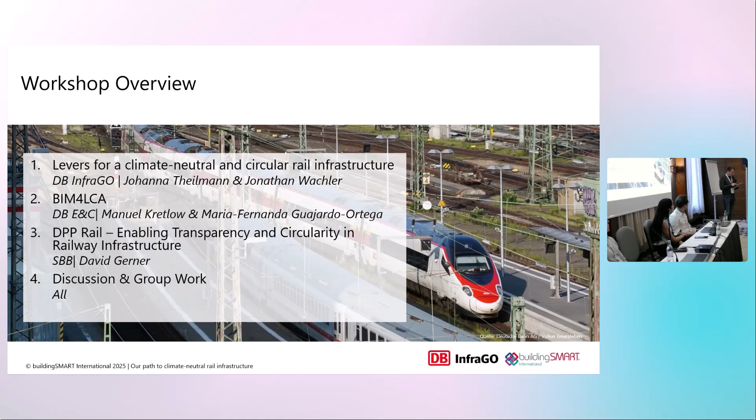It's not only a problem of our advertising that we are currently running. It's also the second problem. What we have to talk about is the mode of transportation. When we compare ourselves to different types of transportation, like airplanes or car transportation, we are the most sustainable one. But it's mostly the case because of the rate of electrification of our transport.

But in the next years, you all can read the news, especially when we talk about car transportation - they will also electrify their mode of transportation. And when we assume that the electrification on the streets is probably around 2030, when we're looking on 2030 or 2035, the rail infrastructure is more coming into the whole picture.

Railway infrastructure is mostly based on concrete and steel, and it's more intense than for the roads, because we have higher loads that we have to transport, lower gradients, and we are faster. So it's a lot about concrete and steel.

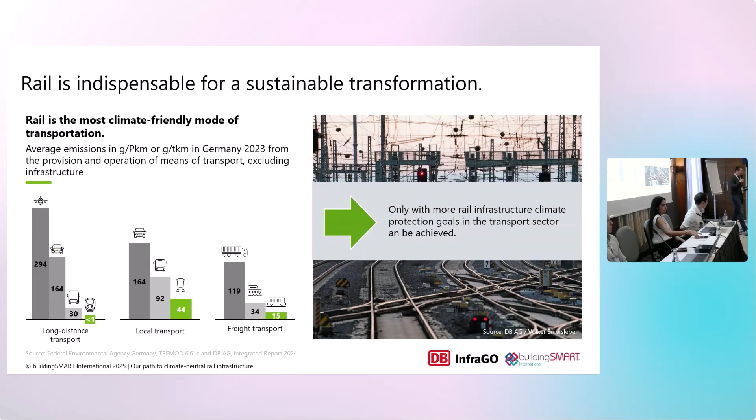It's always good when you make an analysis to know the status quo, and to look a bit into the past to know what the problem is and how big it is. But the more important point is always to look into the future.

We see, especially in Germany, that in the next years a lot of money is going into the railroad infrastructure. You can make a small correlation and also a causal claim: money into railroad infrastructure is money into steel and concrete, and that's always getting higher emissions in the long run. So that's pretty negative for our advertising claim that we are the solution in the future.

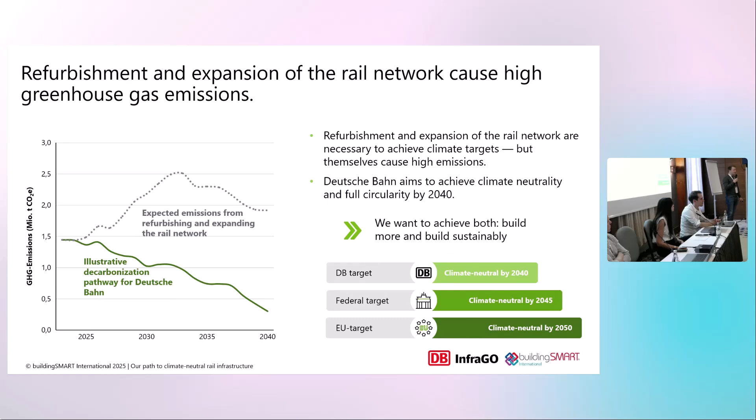What we see is that it's not only important to look into the future and say how big the problem is. The next step is always to look at what you can do in the future to tackle this challenge.

So now it's time for the funny picture.

We spoke a lot with our main suppliers, with our building companies, to ask them what they can do to work on the problem of emissions in the railroad sector. And we came up with 6 levers to tackle this challenge.

The first is always the planning. It's about the materials - we have to focus on the reuse of materials. The logistics is always very important for building infrastructure, and we have to talk about the stations and the maintenance.

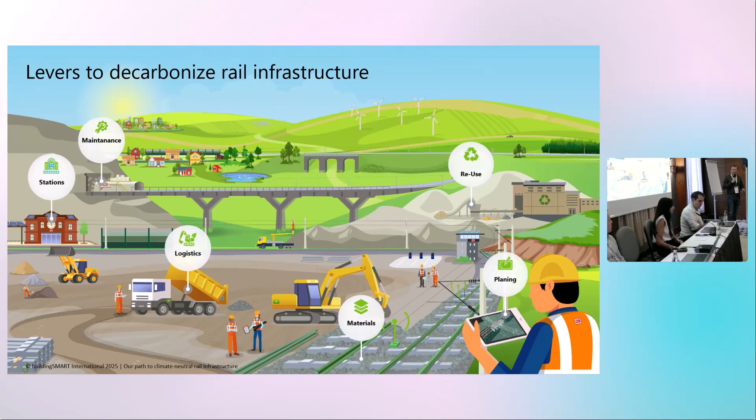These are the 6 main levers to decarbonize the railroad infrastructure and to still focus our green claim. What is behind these levers?

When we start, it's always about the planning. I think you all know that the greatest ability to change a plan is always highest in the first sections of the planning phase - it's always in planning phase 1 and 2. That's where you have the most impact on the infrastructure. So it's about optimizing the construction method, the structure, or the geometry of a building or a bridge.

When we talk about materials, I already said the railroad infrastructure is mainly about concrete and steel. It's also about ballast - ballast is not a very carbon intense material, but it's a lot of load or mass, so we also have to talk about these materials.

We also have to talk about the reuse of these materials. At Deutsche Bahn, we are already pretty okayish when we talk about the reuse of sleepers, rail steel, and ballast. We have different targets for these materials, but we need to get more into these topics, especially in the next years when we start our huge refurbishment program for our railroad infrastructure.

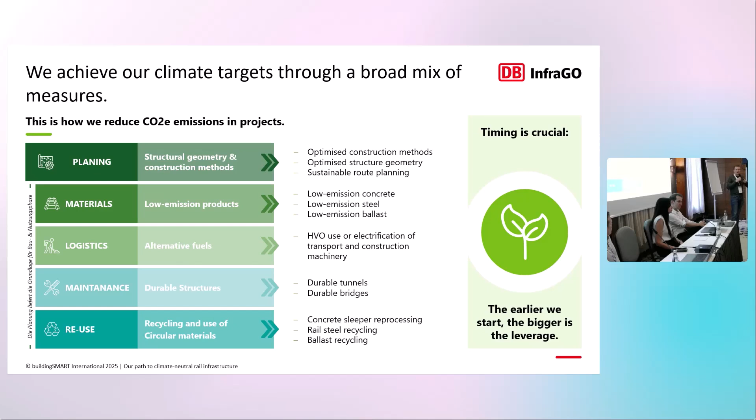Just a short hint to the next two presentations. For us at Deutsche Bahn, we speak a lot about green BIM as our process to assess energy efficiency of our buildings and the sustainability of our infrastructure projects throughout their entire life cycle.

And that's the part where my colleagues come into place. We need more data-driven or evidence-based insights into our buildings, bridges, and tunnels to make good decisions. And that's what Fernanda and Manuel will talk about.

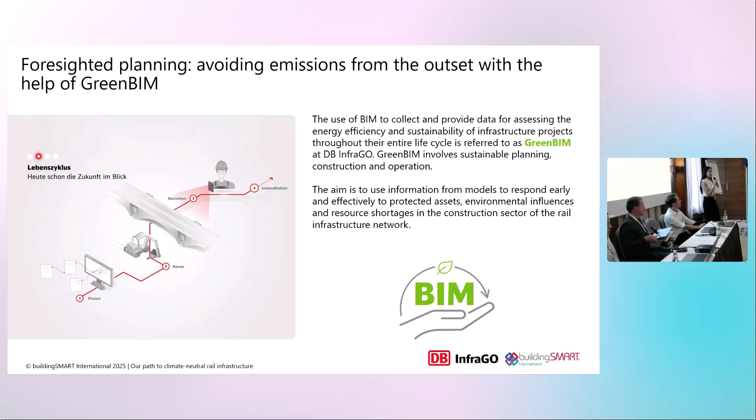Now we understand our goals as a company and where we want to head into sustainability matters. I would like to present a BIM based life cycle assessment, BIM for LCA, which is a tool that we have developed in the DB Engineering and Consulting Group.

So I guess the first question you are having right now is, what's actually a life cycle assessment, LCA? Well, basically, it's the evaluation of the environmental impact of infrastructure in its whole life cycle.

So we take into account the materiality and also the energy flow of an infrastructure project, of course following the corresponding standards and norms, which gives us a framework to work with.

I guess you're more familiarized with this type of analysis, but from the perspective of costs. So we evaluate, okay, how much is my project going to cost in the construction phase, how much I will need to pay for operation and maintenance.

We analyze this throughout the costs in euros, in dollars, in the currency you're working on. We do something similar, but with carbon CO2 equivalent emissions. And therefore, we can evaluate different designs and take good decisions based on the information.

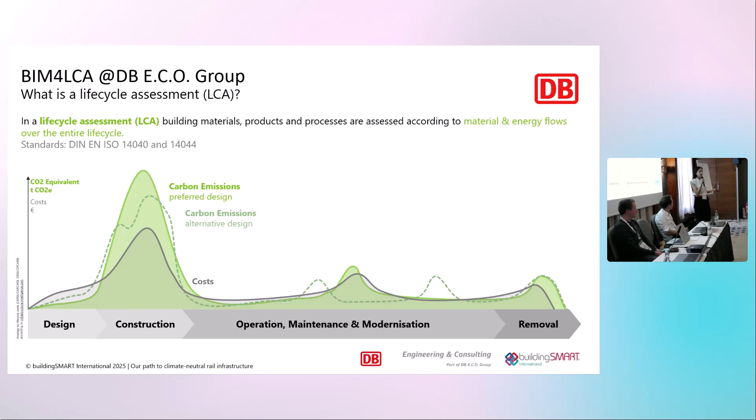Okay, really nice, this idea, but where can I get this information? How can I calculate the CO2 equivalent? Well, here we have a very important part, which is the EPD, the Environmental Product Declaration.

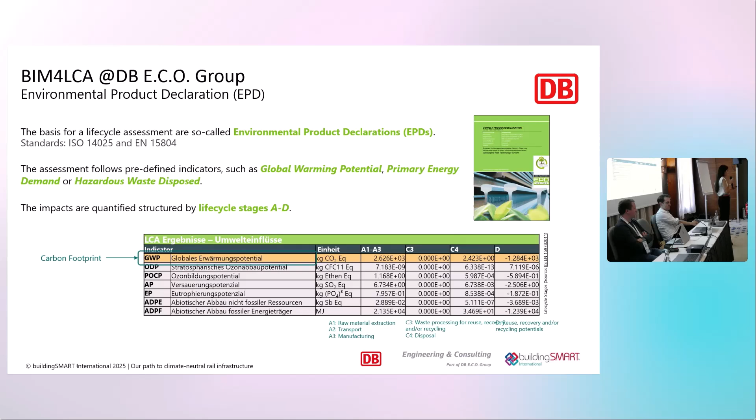Really nice. Now, you haven't spoken about anything related to what we are here for at this conference, Building Smart. Well, we already spoke a little bit about the environmental information, but there is a very important part, which is the information of our design. And here is where BIM comes in. I have pointed out three main topics that allow us to do a life cycle assessment.

The first one I have pointed out is open BIM formats. Of course, we need the information of our infrastructure project. How can we access this information? We can access it through model integration via IFC.

Of course, we also need standardized environmental data formats so we can create processes. This can be, for example, stored in XML, but with standardization, so we can have consistent life cycle information.

Also very important, we need access to EPD databases, which should also be reliable. In Germany, we have the Ökobaudat, which has a considerable number of EPDs, which we also use in the evaluation of our projects.

So to create an LCA, a life cycle assessment, and to reach its full potential, we need to integrate the data and make it interoperable. If we have centralized data management, we can connect the BIM information model with the environmental data.

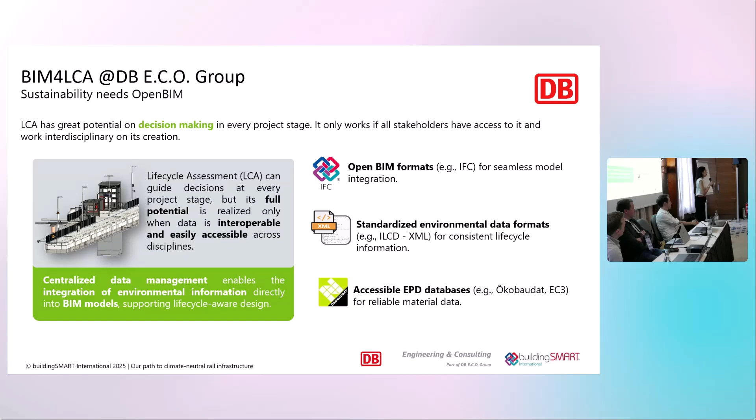In IFC 4.3, there is actually also the possibility — there's the Pset_EnvironmentalImpactValues, where you can see the climate change value. I don't think you can read it because it's quite small, but believe me, the information is there.

But we think that the workflow this offers is not so efficient. That's why we suggest a different approach: BIM for LCA, which allows us, with a very small number of LCA attributes, to connect the object information to an external EPD database. So we are not storing the whole EPD information in the model or in the objects.

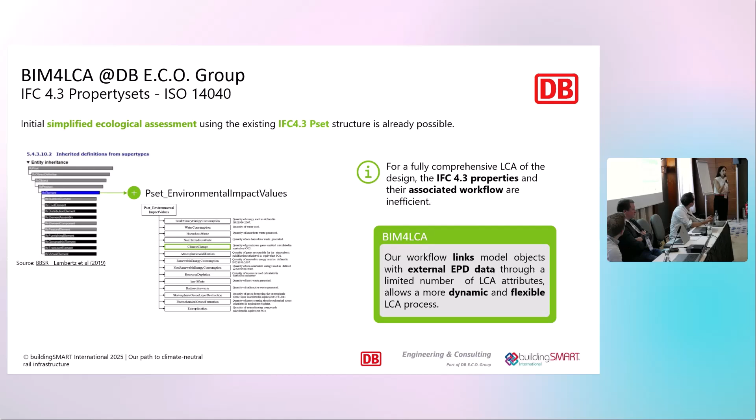Here I have an example to make it a little bit more clear. So if we have a BIM model, the first thing will be, okay, we have the object wall. Then throughout the BIM model, we can get the quantities. In this case, we have 129 cubic meters as volume. Then we go to our EPD source and we search for the material information. In this case, this is concrete.

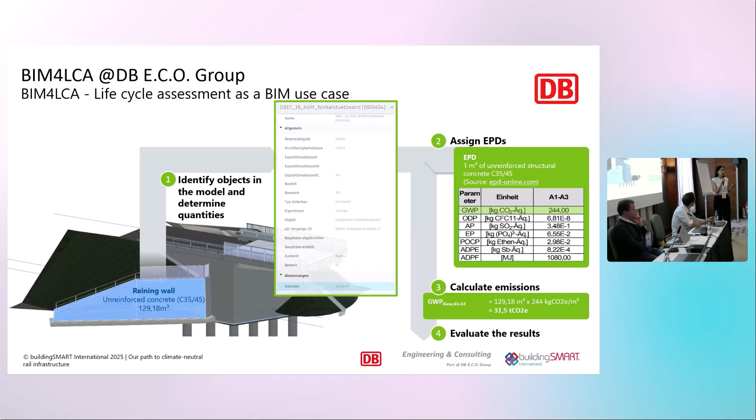C35/45, and we can see that the cube, which is 1 cubic meter, has a global warming potential of 244 kilograms of CO2. So as we are working also with the same units in this example, it's quite easy. We do the corresponding multiplication, and then we get for that object the amount of CO2 equivalent emissions. This is a very general example, so we can understand a little bit how this works.

But this is the workflow that we are using at the moment, which is a full model-based approach. We start up with the discipline models, the different discipline models. Then we create the coordination model, the federated coordination model. And from this model, we only use some few LCA attributes. And then we get the quantities based on the BIM model.

And we transpose these quantities to our own LCA engine that we have created. And this connects this information with external information through APIs, so application programming interfaces, to external EPD data. This can be the Ökobaudat here in Germany, but we can also use different sources of information. And then we do the right calculations in this engine, and then we return the results, which can be also exported and further analyzed.

But also, we don't want to stay there. We are also working on BIM model, so we must use the chance also to visualize the results in the coordination model, which we also do. This is quite dynamic and flexible, so we can change, and if there's a small change in the EPD database, we don't need to change the whole information in the objects. We just update these connections. And this allowed us to make a faster iteration process with the design.

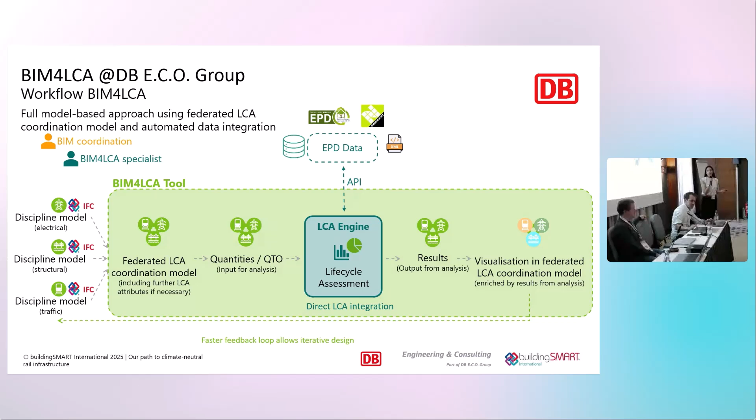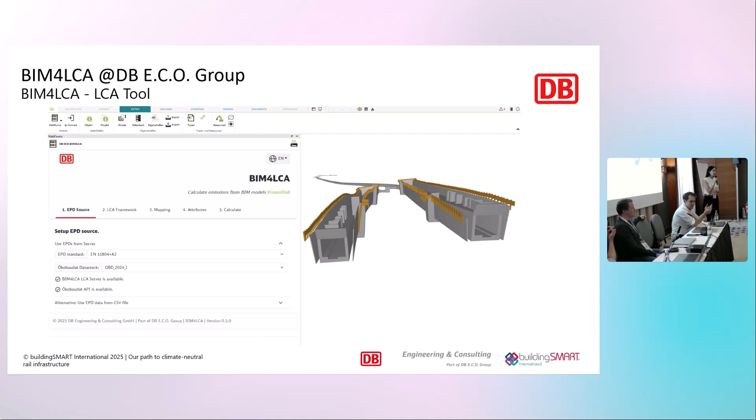But afterwards, we are going to have a live demonstration. So if you're interested, my colleague is going to explain that, and you can approach us and we can show you different models that we have done the analysis, the LCA analysis. And we can see the different settings that we have used and the LCA attributes that I have mentioned here.

So here also we have a project which was the administrative building of an ICE trains depot for Deutsche Bahn Fernverkehr. And we had two designs, and with the tool we could also visualize how were the emissions of the two designs. Also, we have here a better understanding of the emissions in the different life cycle phases. And therefore, we can take more informed decisions based on data from the BIM model and also from the environmental information.

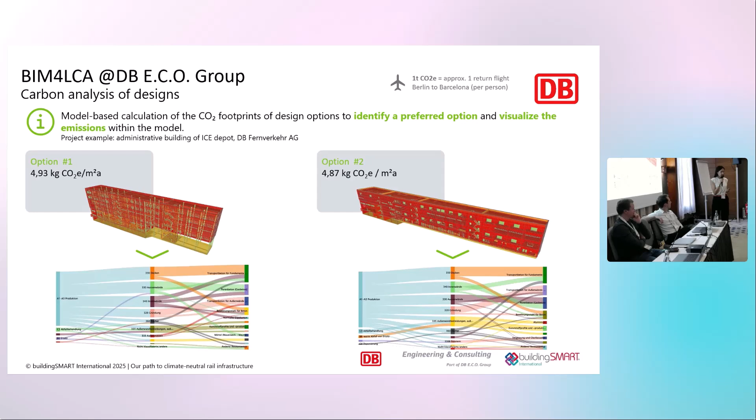Also, we can very nicely visualize the results by classification. So we can see, okay, which parts and which objects of our model are having a higher environmental impact. Here we have, for example, interior walls, external walls, stairs, slabs, and so on. We can also see it quite nicely in the model, directly in the model.

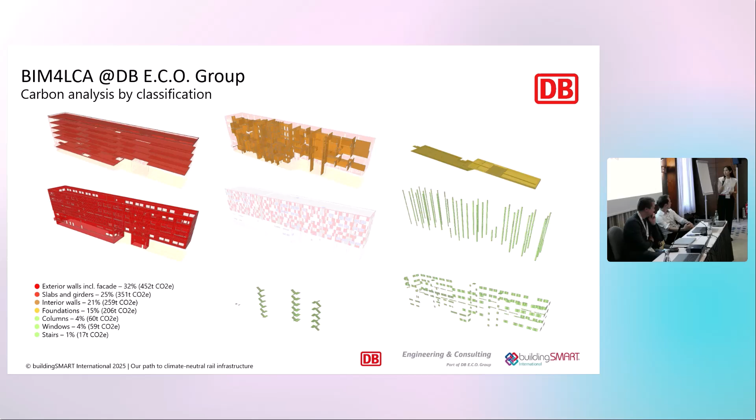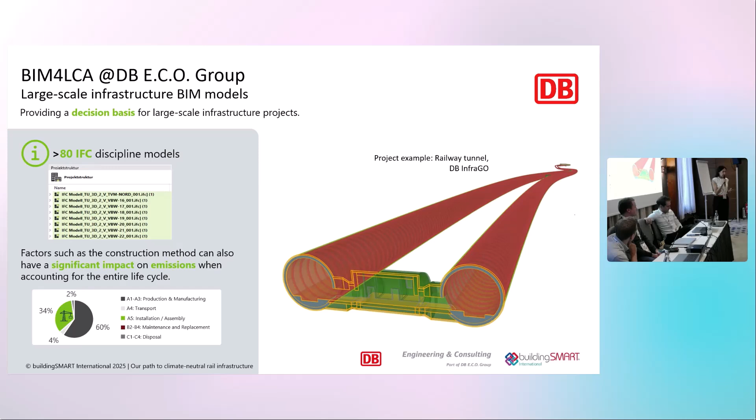And in Deutsche Bahn, of course, we have also many large-scale projects. This was an example of a railway tunnel for DB InfraGO, where we had more than 80 IFC models, but with our workflow, it was actually quite nice to work with because we're working with the federated coordination model. And also a very important topic: usually people think, okay, the emissions are more focused on the manufacturing part. But if you see in this example, we had the information because we did the LCA. We also knew that 34% of the total emissions came from installation and assembly, which is not a small number. And without this, we would not have known that.

So there is a not small challenge in the railway domain with the life cycle analysis assessment, and it's that EPDs are quite difficult to be found for such a specific domain. But we also have an opportunity because we have a very high level of standardization in the rail domain, which allows us also to automate our processes.

So in DB Engineering and Consulting, we have our BIM standards, which is basically an object library. And in this object library, we have also unified a level of information of our objects. So we can create these databases that map the objects, the standardized materials, sorry, with the right EPDs. So if we have a model that has standardized objects, we can automate this process. And even if we have objects that are not standardized, but have standardized materials, we can also standardize these parts.

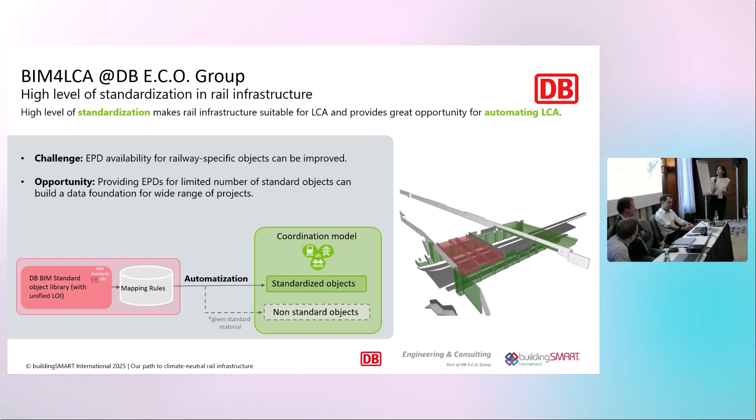Standardization doesn't only help us to automate the whole process, but also gives us the opportunity to use GIS data and statistical analysis to perform a life cycle assessment in very early stages of design, which is a huge advantage.

Here I have a map where you can see visually the colors of emissions, spot the highest points, and also analyze further with other types of diagrams and information. So yeah, this is the current state.

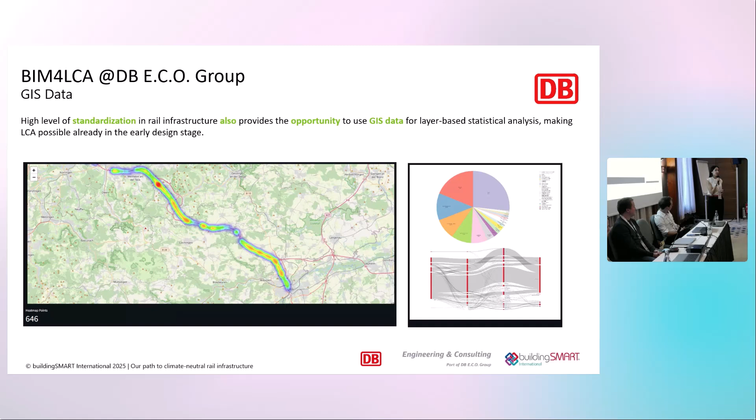Perfect. Yeah, so also welcome from my side. We have heard first on a very strategic level, then we went to project level. Now I take you on a journey on element level. We're talking about rail tracks.

Because at SBB, we're a railway infrastructure, we are dealing also with sustainability and circularity. However, we try to do it in line with, as we heard yesterday, the European regulations implementing DPPs, and we really try to take most advantage we can from the standardization processes. But before I dive into my presentation...

So great, putting some context. There is something called the Greenhouse Gas Protocol, and it's actually a very powerful protocol to explain CO2 emissions. It divides them into three scopes. Scope 1, direct emissions, we are in charge.

It comes from maintenance of railway infrastructure. Scope 2, indirect emissions, but we have an influence when we purchase energy. And then there's scope 3, our supply chain, and you see it's by far the largest chunk.

So this is our material flow analysis by SBB. These are real data collected in 2023, but it hasn't shifted that much since then. And if we look into our supply chain, we have created further categories, and the biggest category is almost 40% steel, which is not that surprising.

Again, we're a railway company, so it comes from rail tracks. And it's not only the load and the weight of the material, it's also 630 kilometers of rail tracks that get replaced every year. And of those 630 kilometers, 10 kilometers on average we reuse in other parts.

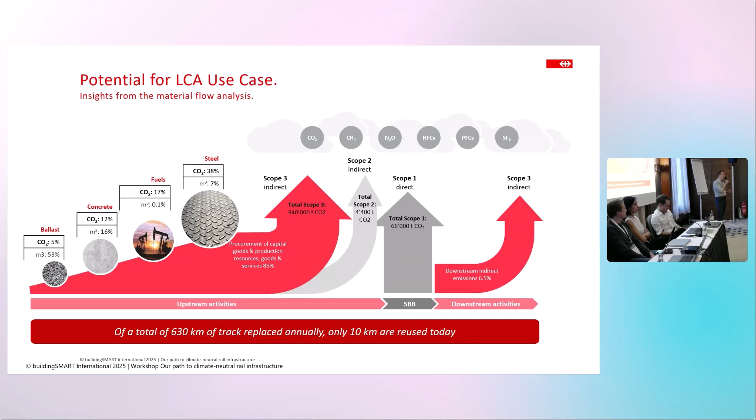And this is not because the rail tracks don't meet some standardized quality levels anymore. It's often just a simple fact that at end of life, we don't keep track of them, and it's just way easier to recycle them than to reuse them.

So what's the goal? The goal is we want to take decisions on an informed basis, and for this we need data. Because if we don't have data, rail track A and rail track B are exactly the same. We have differences like price, quality, safety, but we were already aware of them before.

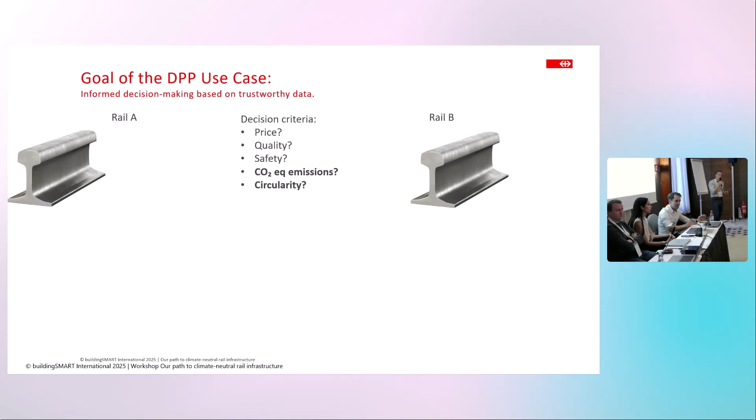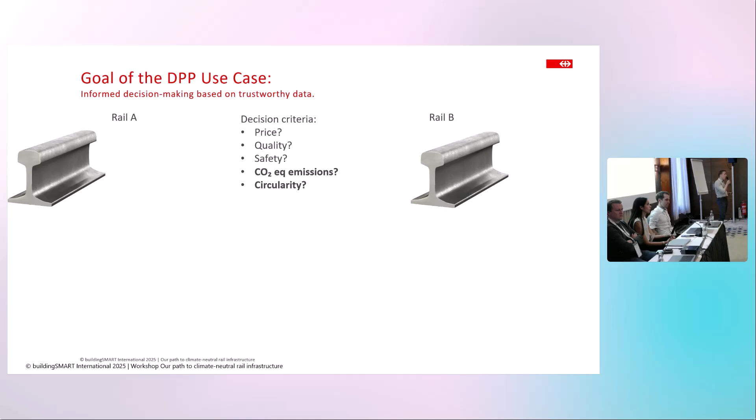But now with the DPP, the regulation Lars Fredlund was referring to yesterday, we have environmental data, essential characteristics about products placed on the European market. And we need this information so we can prove that rail track A is not equal to rail track B.

So data is key, and not only the data, it has to be trustworthy. That's why we have regulation, that's why we have standardization. For the last 1.5 years, we have been working in CEN JTC 24 to standardize the digital product passport standard.

Revision of the draft standard was just finished. And we heard it also, I think, today in the GS1 input, that Q1 next year the standard will be published in the official journal. So we're not talking about something that might come in the future, it's already here.

So the trustworthiness of the data is very important, because if we don't have it, we depend on self-declarations, we depend on average values from databases. So we again have to treat each product from the same product group exactly the same because we apply an average value. We are not aware of the ingredients relevant for circularity.

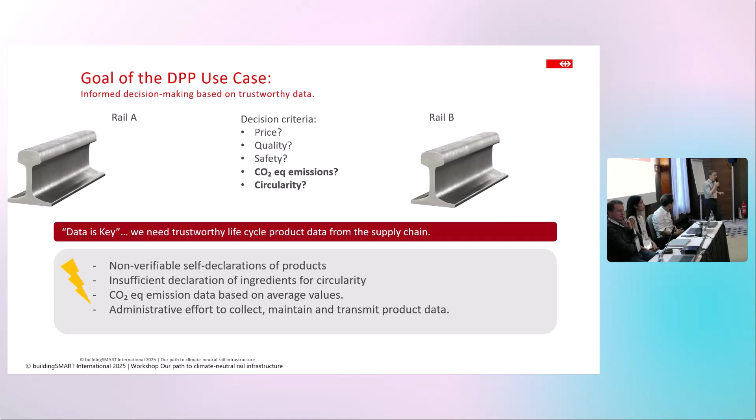So a lot of use cases that require this information are impossible. And last but not least, it takes a huge effort handing over this product information across the life cycle of a product, across systems. That's why DPP is here. DPP is the tool we can use. We don't have to, but we can, and it delivers a solid data foundation that would enable many use cases touching on sustainability and circularity.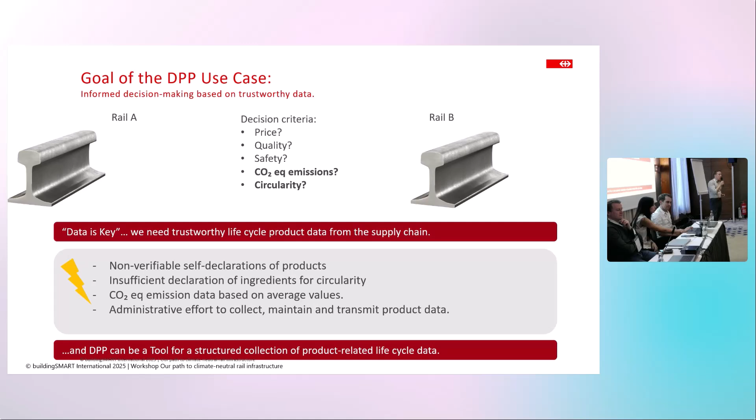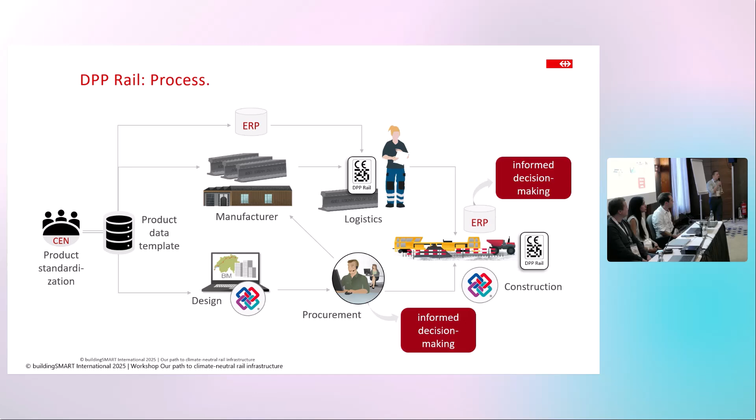Then last but not least, on the right side, once we have the same structured data in our ERP systems, where maybe we have inventory systems talking about the physical product, and we have the same structured information in our BIM models, then we will be able to connect them and know where what product is located. So at end of life, it doesn't happen that we lose almost 620 kilometers of rail track per year, but maybe we can save a bit more and reuse a bit more.

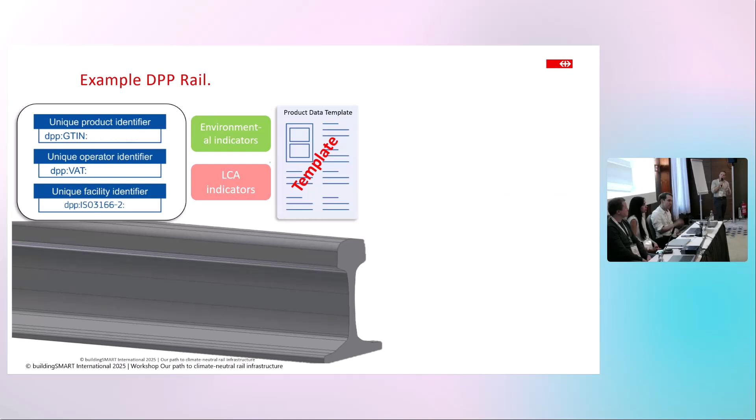So I'll quickly go through all three processes in detail, but I'm not going to spend too much time because in the product domain there are many other sessions going way more deeply into it. But what I wanted to show here is that this product data template used by the manufacturer has the integrated environmental product declaration that we just heard of.

And here we're not talking about general EPDs, we're also not talking about manufacturer-specific EPDs, we're talking about product level EPDs. So it's not every instance, but batch level. And this is very important because this reliability, this trustworthiness of data will be very crucial if we take a decision on which product to buy and don't want to be solely dependent on a price criteria, but maybe also on a sustainability related criteria.

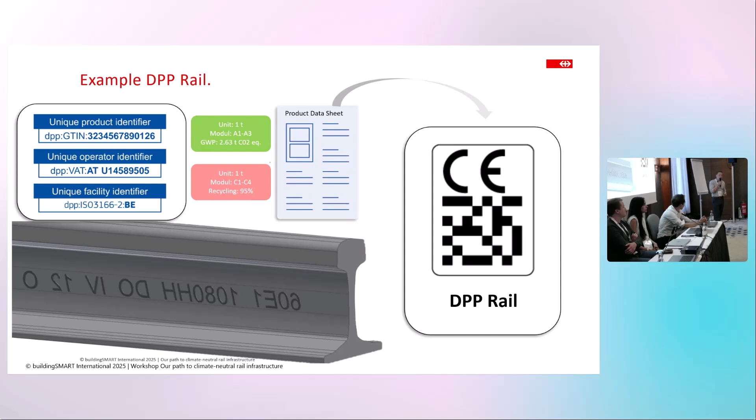So this is how manufacturers get their product data templates, create their product data sheet, and attach it via a data carrier - could be a barcode, could be a QR code, could be RFID, whatever. There's going to be some freedom for manufacturers to choose what suits their product best.

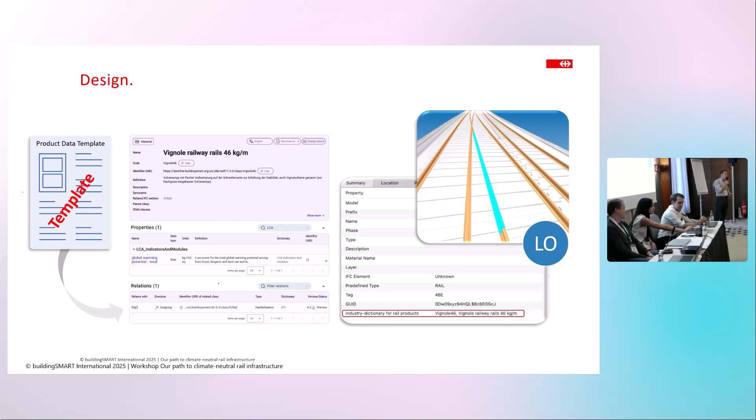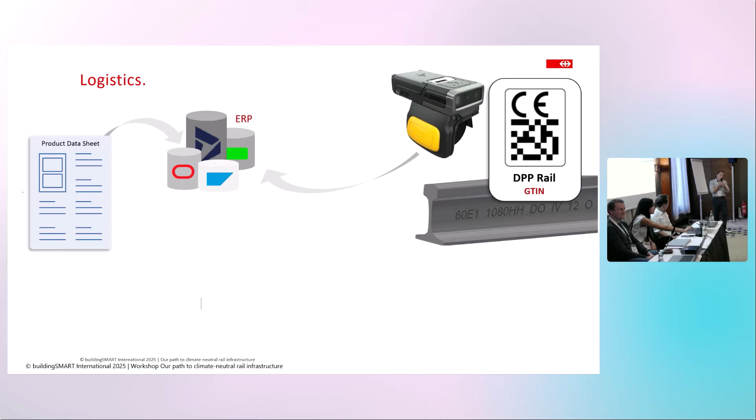In our proof of concept, we have this additional difficulty that products like rail tracks get delivered in 108 meters, and we have our storage capacity in 12-meter coupons. So we are going here with some GS1 solution, but it can be any other solution where we have to cut rail tracks into these coupons, 12 meters, and we add additional identifiers. But all identifiers can be traced back to the original DPP, because that's important. In the end, when we have end of life of a product, we want to know what was the origin DPP, so we know exactly what was the environmental footprint.

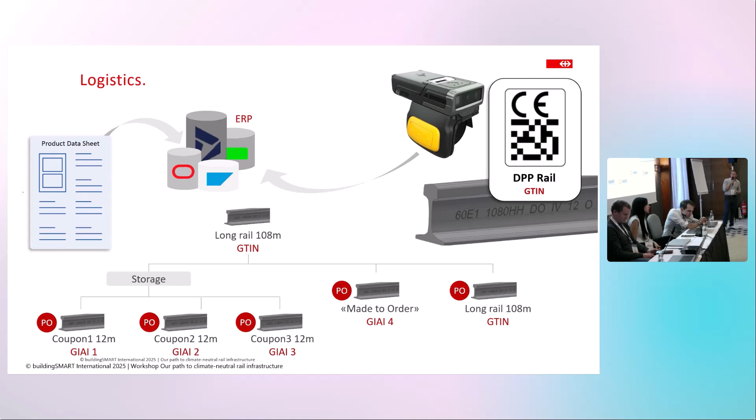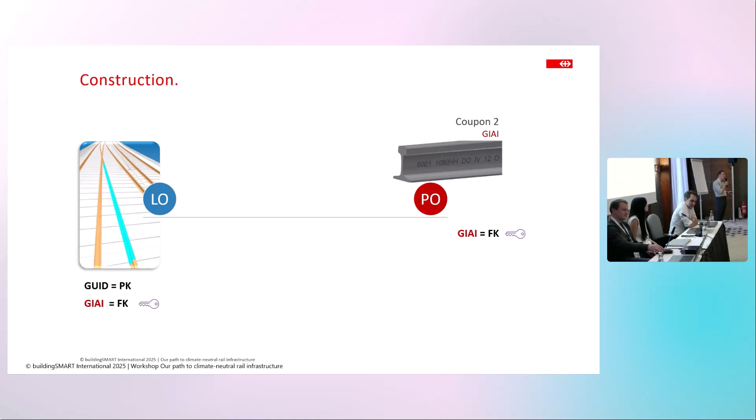So now where the matching happens on the construction site, we were talking about this logical object using the same product data templates. We're having the physical object in form of the product that's delivered by the manufacturer. And we can match them on the construction site by using a product identifier, just as the GIAI.

This process still has some manual work involved. Like welding of rail tracks, someone has to scan which identified product goes to which place in the BIM model, but it can be integrated into existing processes like the documentation of welding, which is already part of the Swiss Federal Railways process anyway.

If we look, it has been discussed in the session before where we were touching very quickly on the semantic web. The DPP will also be available in an RDF format, so we will have linked data principles. In the end, it's not only the product identifier that we can store in a BIM model or an ERP system, we can also store a URI that will lead to this EU registry where we can retrieve the values we're looking for. And this opens again new use cases.

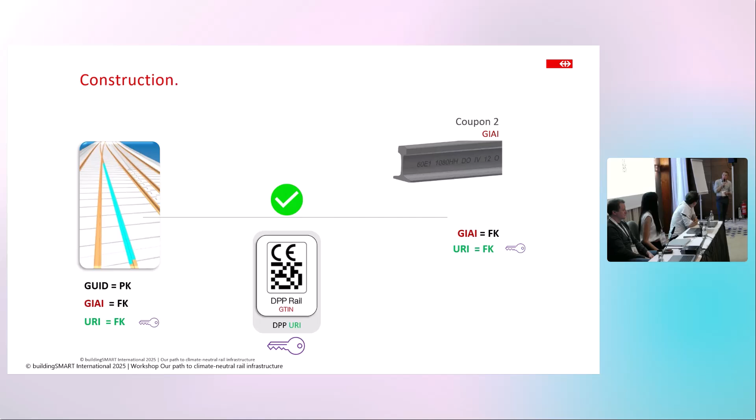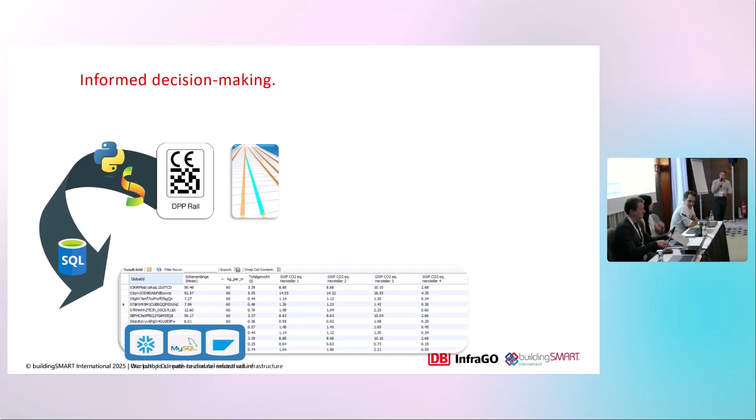Just to sum up, one use case I would like to present to you because it's actually very powerful and very simple to implement. If you have already collected some EPDs from manufacturers, you can use the same approach as I just did, using the values from the different EPDs just for the product of a rail track.

And you will see that sometimes environmental emissions are 3 times as high for the same product, just because maybe the manufacturer invested in some decarbonization of manufacturing processes. Currently, we can't consider that criteria because we depend on averaged environmental product declarations, and we have a spend-based approach where we're just going to take the cheapest offer, because we would also have to compensate emissions depending on the price.

So with DPP, we can account for the effective emission on a product level, and it will be a new criteria that we can take into consideration to make informed decisions in the decarbonization of our railway infrastructure. Yes, so that would be it from my side. And I hand over to Jonathan, right?

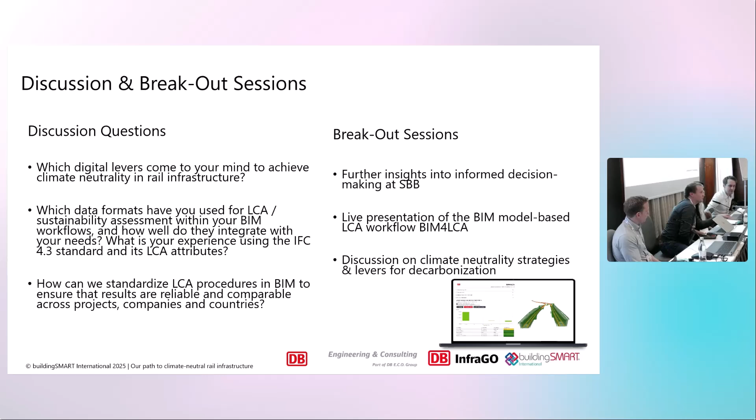We already heard about some hands-on insights into the tools, and I ask David, what did you prepare for our participants? Yes, there's a slight change. With me it's going to be a hands-on, interactive workshop session, not too long, thinking about information flow of LCA-related information, not only within BIM tools, but literally from logistics to reuse. And that's not the only offer we have for you.

We are going to show the tool live here. We have 2 examples on my side, a building and a depot, and Manuel also has on his laptop 2 examples of real projects, a tunnel and a bridge, so we can see the LCA attributes and the calculations done in the tool.